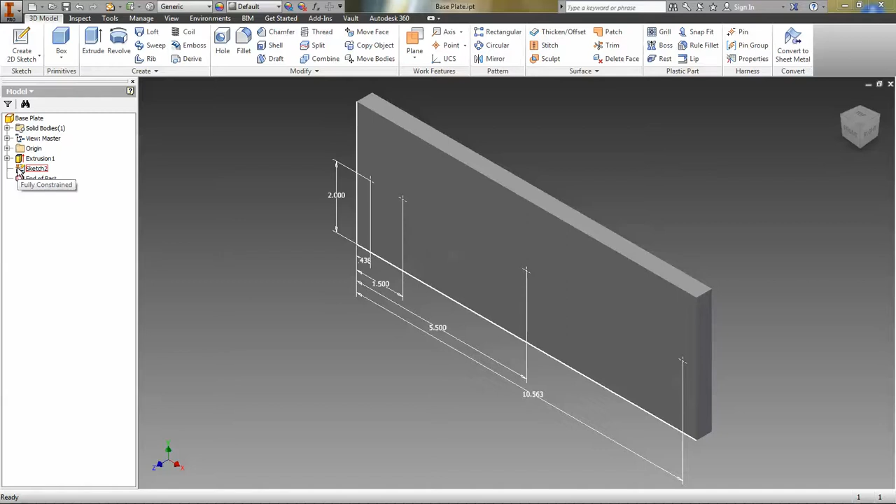I've fully constrained those with these dimensions that you can see here. I'm going to right-click on the sketch and hide those dimensions so I don't have to look at them. Now we can add our holes, and notice it automatically selects those 4 center points. We don't want all 4 holes to be the same. The 2 on the edge are going to be the same, so I'll do those together, and then the 2 inner ones are going to be the same.

I'll do those later. If you look at the dimensions on the worksheet, those outermost holes are 1/4 inch diameter all the way through, with a countersink feature 1/2 inch at 82 degrees. So I need to pick my 1/4 inch diameter, 0.25. It doesn't tell me what class, so I'm just going to use the 2B class as a good medium class to use. 1/2 inch countersink, there we have it, through all.

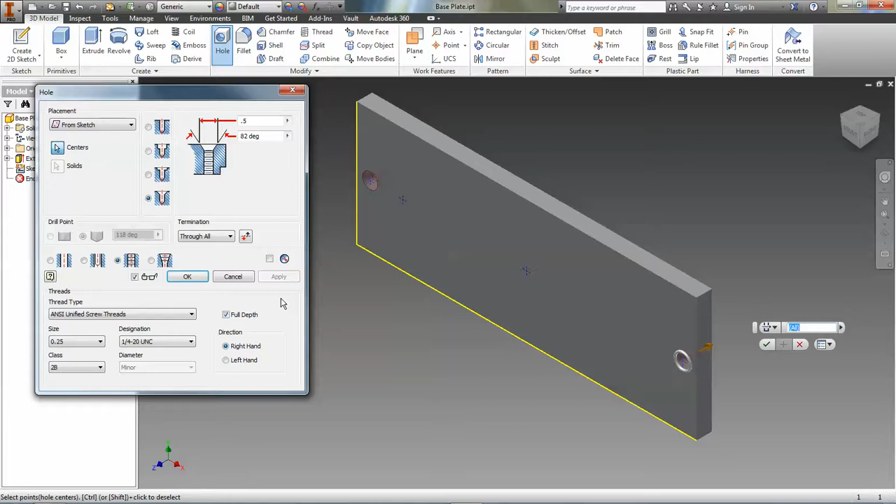Now notice the 2 other center points go away because that hole feature has consumed the sketch, so I have to right-click and share the sketch. Then I can do my second hole feature on those 2 remaining holes.

Those are going to be 0.3125, straight through plain drilled hole, 0.3125, and not threaded, all the way through.

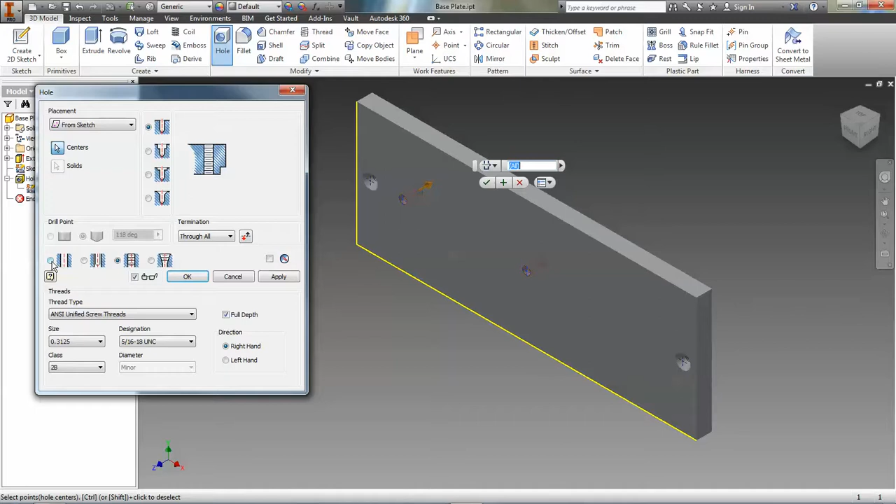Click OK. Then on the 4 edges we have the fillets, 1/2 inch fillets, and then a chamfer all the way around the top and bottom edges. So we'll do that next.

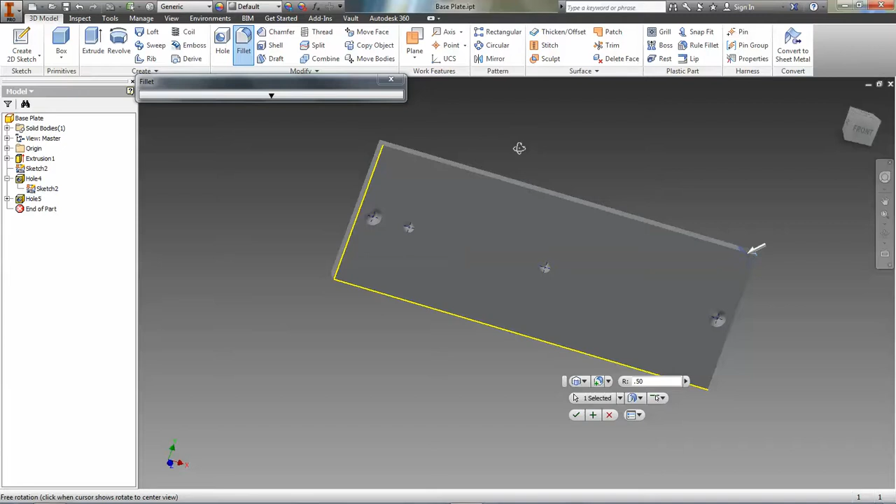First, the fillet feature. Now again, for the fillet, if all the radii are the same for your fillets, you should do them all in one feature. You shouldn't have multiple fillet features if they're all the same. So we check, my radius is 0.50.

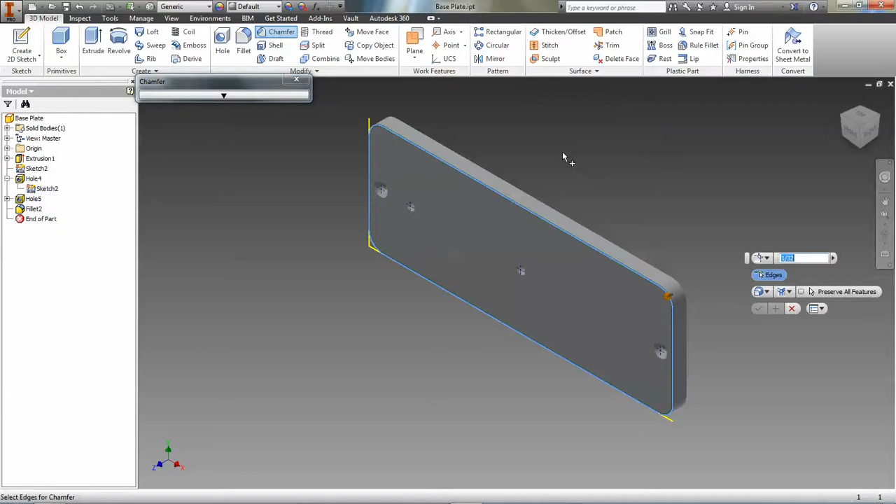That's correct. Now the chamfer feature is kind of like a fillet, but instead of a curve or a round, it's just sort of a 45-degree angle, or at some angle. All your chamfers, if you look at the directions, it says your chamfers are 1/32 on the top and bottom edges.

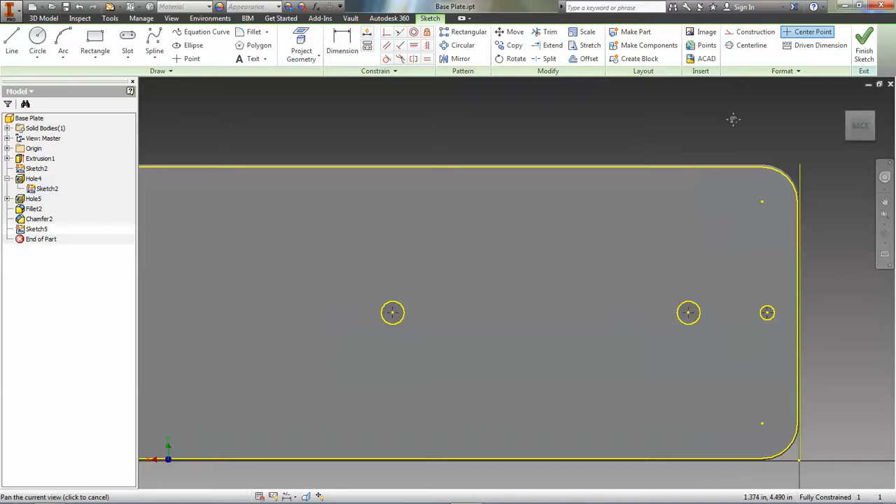Now we're done with everything except the holes on the back side or on the bottom side. We need 4 holes at the corners, threaded number 8-32 thread holes. Now I do need to create a sketch there, but you'll notice I already have the geometry that I've already created projected onto this surface, onto this sketch. So I can actually latch onto these 4 center points.

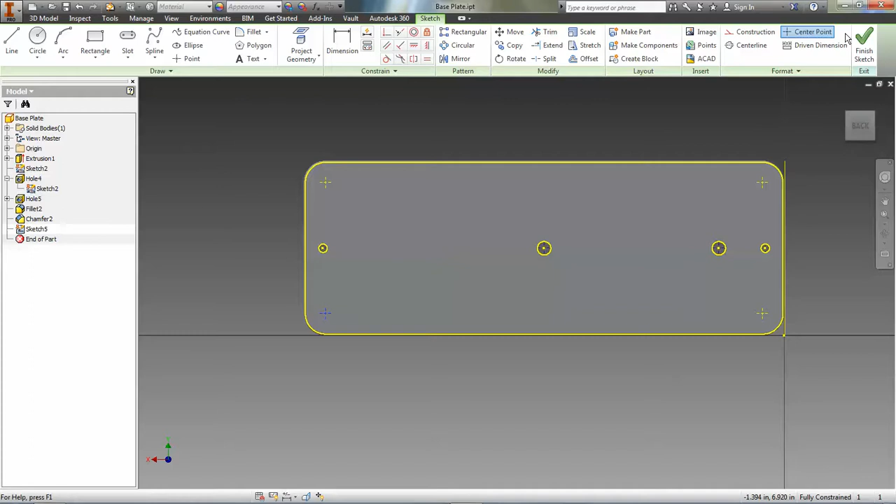Center points of the fillets that I used. I don't have to actually create separate center points. I'm just going to change them to center points in the formatting palette. Then I can use the hole feature, finish that sketch, use the hole feature, select all 4 of those, 1, 2, 3, 4, and again, these are threaded holes.

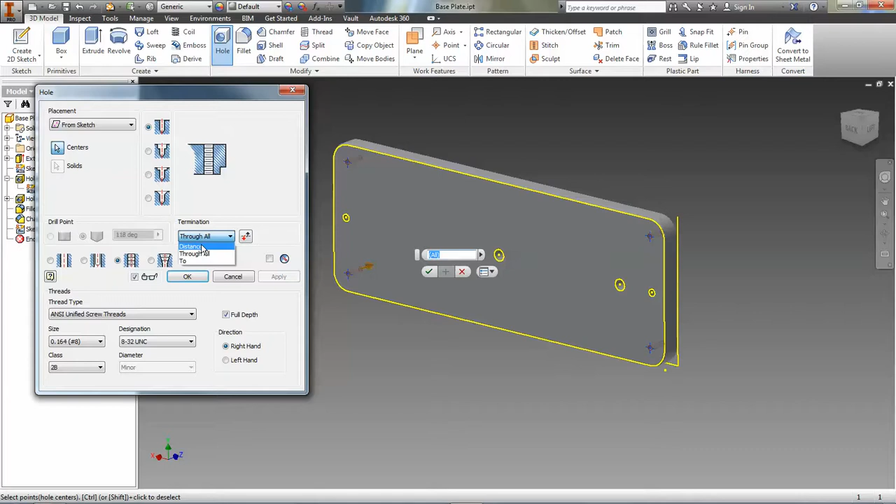My threaded option is down there. Number 8 thread is a smaller sized machine screw, and number 8-32 class 2B. And it's not all the way through, so I have to set a distance. Not all the way through, doesn't go through to the front. The depth of these holes is 0.2875, so I need to type that in here, 0.2875.

And then you'll see they don't go all the way through if I look on the back on the front side. So there's my threaded hole, number 8 holes in the back. Flip it around, and there we have it.